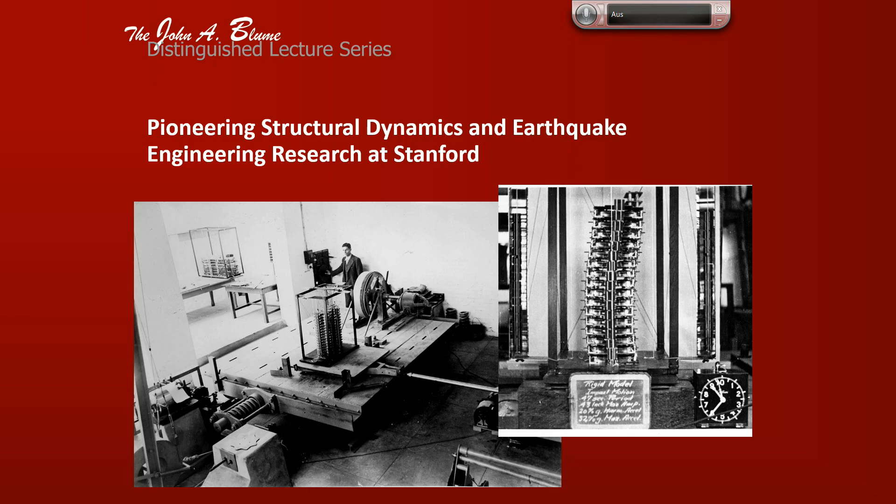This is a picture of the early shake table put in shortly after the 1906 earthquake, used for looking at structural models. There were also some studies looking at ground deformations at the time. A lot of John Blume's papers, I was looking at some of his paper titles today, focused on introducing soil effects and thinking about the effects they had on ground motions. This was in the 1950s.

Then John Blume Associates, from those very early days with that kind of analog shake table, brought it forward into his company.

This is just a snapshot of some of the projects John Blume and Associates worked on, in particular bringing in work from Stanford that goes back to Jack Benjamin, Alan Cornell, and Haresh Shah in early seismic hazard analysis, and Kavazanjian, looking at things like Diablo Canyon, Stanford Linear Accelerator, anywhere there were challenging aspects related to probabilistic seismic hazard, and also interesting mechanics problems like the NASA Ames wind tunnel and so forth.

So, kind of an amazing career. And John gave back one more way in that he endowed the Earthquake Engineering Center here in 1976. This is a picture of the two, John Blume along with the two founding directors, Jim Gere and Haresh Shah at that time. And so John's always been really a leader in professional practice, research, and education. And of course, that's something we like to continue here in the Blume Center, not just our research, but kind of bring that into practice and education.

So this is just an occasion to kind of take note of that, especially for the younger folks in the audience who haven't been here over the years. My colleagues have maybe heard this presentation from me a few times, but something to remember.

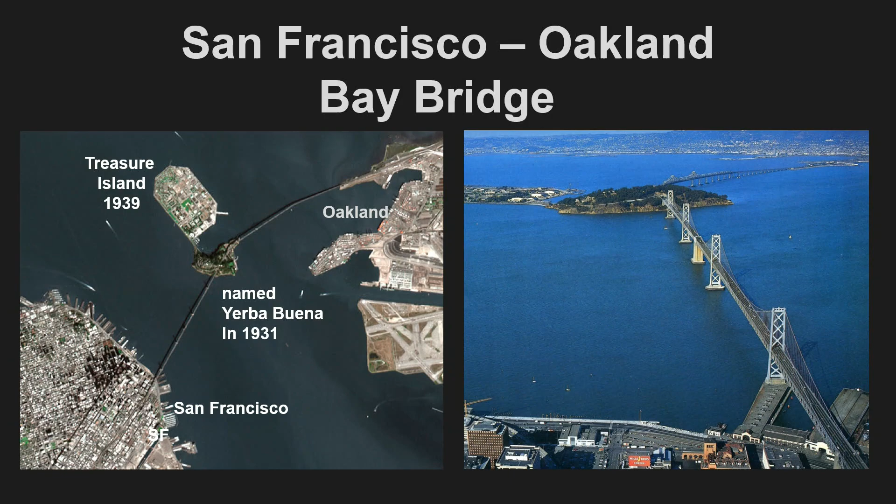They made soil exploration first, designed by this man called Purcell, Charles Henry Purcell. He started at Stanford with one or two semesters of training, then went to Nebraska, and became a state engineer in Oregon and then in California. He was selected as highway engineer for the Bay Bridge in 1930.

Later he became chief highway engineer. The other person I'm showing here is Glenn Woodruff, who was the main design engineer, a very important person for this project. He was later appointed to the board of engineers investigating the Tacoma Bridge failure.

And the final blueprints—for me it's amazing that the time from the starting point, let's say 1930, until they began to build the structure, was very short. In comparison, the Golden Gate Bridge took much longer; they proposed many things and planned extensively, but here it was very, very fast.

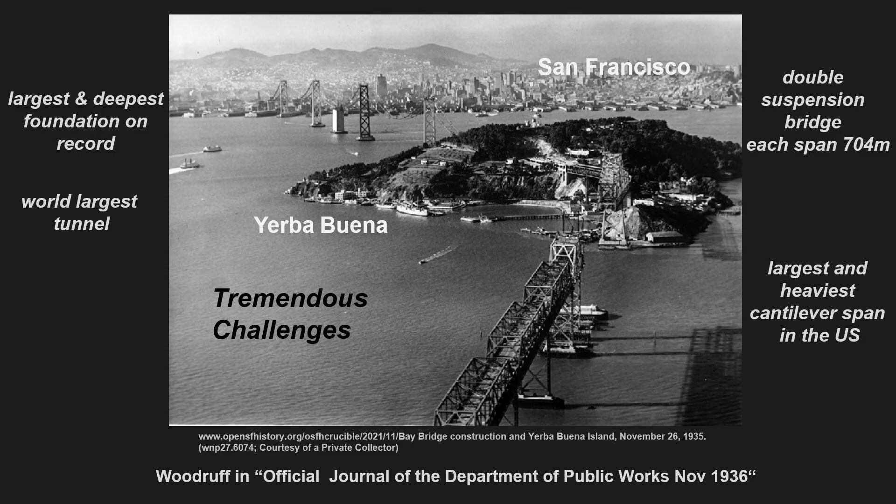I cite here Woodruff, the main engineer. When the Bay Bridge was finished, he wrote a report mentioning four extraordinary points about the project. He said: we built the largest and deepest foundation on record, and the world's largest tunnel. On the other side, we built this double suspension bridge, hooked together—each span 704 meters. And we built the largest and heaviest cantilever span in the US, on the Oakland side.

These engineers of course did different studies on what kind of system to use. We don't have time here to go into details, but it's very interesting—there was one proposal for a single suspension bridge, very much like the Golden Gate Bridge, almost the same span. But others were proposed, and finally they chose the two suspension bridges.

Ground anchoring is an important factor—anchored on the sides, and then in the middle with this huge block. On the other side, you know what has been selected.

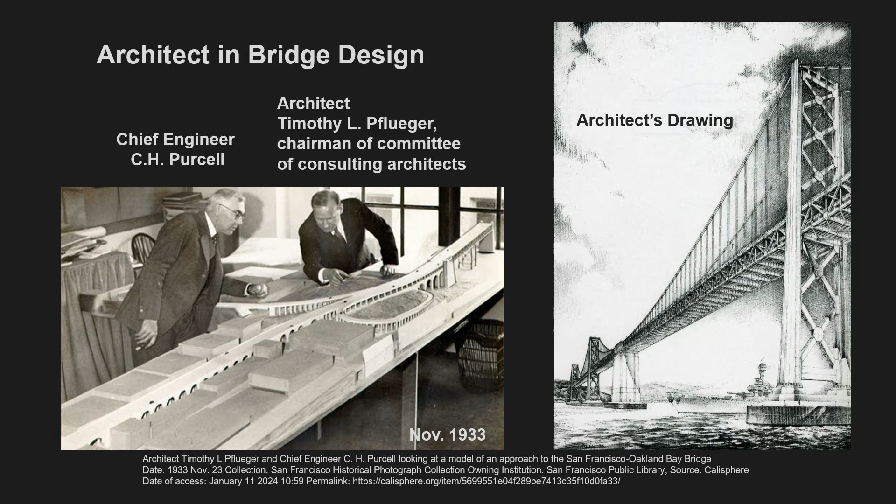Interesting enough, on both bridges architects were involved in the outer appearance, the aesthetics of the bridge. Here it was the architect Timothy Pflueger, seen here with chief engineer Purcell. He was chairman of the Committee of Consulting Architects, and they produced these wonderful architectural drawings. Here is a typical piece of work where architects apparently influenced the final appearance.

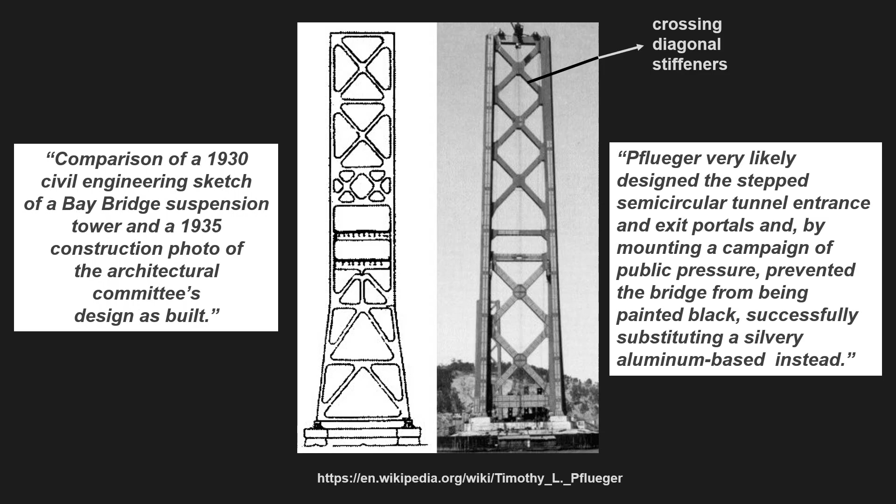This shows a comparison of a 1930 civil engineering sketch of the Bay Bridge suspension tower and a 1935 construction photo of the architectural committee's design as built. It was a little bit changed—they took out the horizontal bracings there.

Pflueger very likely designed the stepped semicircular tunnel entrance and exit portals, and by mounting a campaign of public pressure, prevented the bridge from being painted black, successfully substituting a silvery aluminum-based instead. So the architects apparently had some influence. This is a discussion I've had throughout my academic life—the cooperation between architects and structural engineers. It always comes up, and very often people find the names of famous architects attached to bridges, but the engineers are not mentioned.

So this was a very interesting construction going on. Of course, the foundation was a big challenge for them. Muddy soil on the San Francisco side, 73 meters below water level, and they used this caisson technique, big boxes lowered down, with airtight steel tubes to control the buoyancy, so they could lower the caisson and start the concreting. This was standard technology at that time.

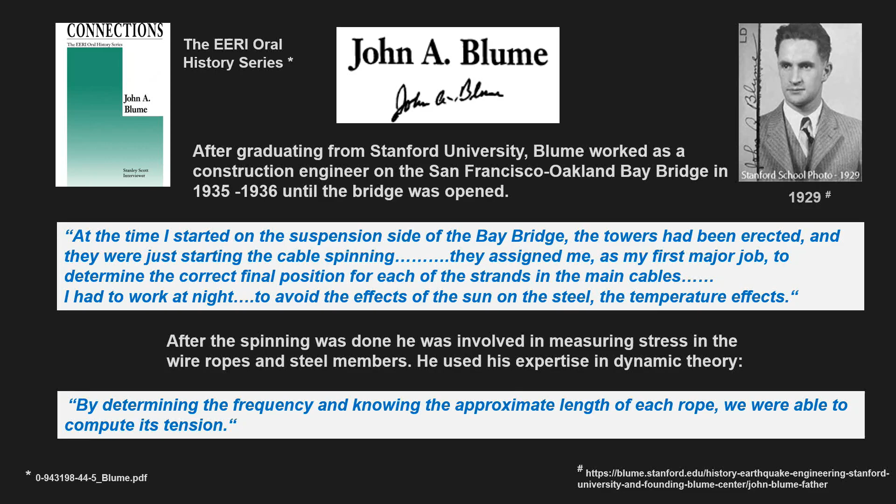There's this fantastic oral history series one can look at, and I'm quoting here from that. At the time I started on the suspension side of the bridge, the towers had been erected and they were just starting the cable spinning. They assigned me as my first major task to determine the correct final position for each of the strands in the main cables. I had to work at night to avoid the effects of sun and the temperature effects on the steel.

After the spinning was done, he was involved in measuring stress in the wire ropes and steel members. He used his expertise in dynamic theory - we heard about that with earthquake engineering - but here he used it already for some other purposes. He said, by determining the frequency and knowing the approximate lengths of each rope, we were able to compute its tension.

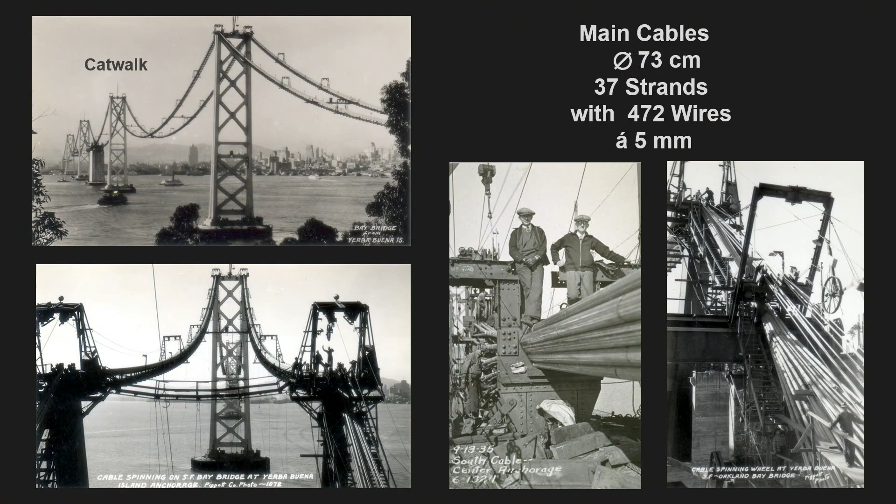The construction went on, and the so-called catwalk was established, seen here. The main cables were done, the spinning process started with all the individual wires pulled from one end to the other, and you see here these nice pictures.

Then, typical for a ground-based suspension bridge anchored in the ground, the construction is a very easy task because you can ship these prefabricated elements to site and simply pull them up. That's totally different from a self-anchored suspension bridge we will see later on.

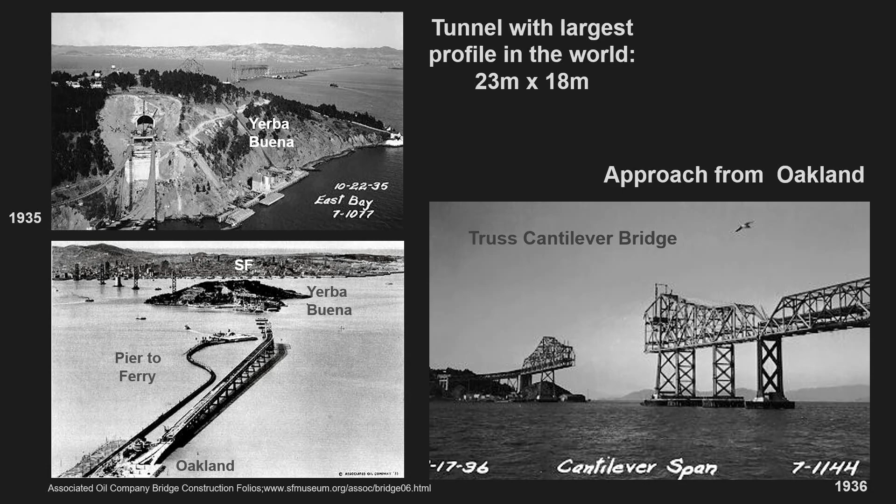So the double profile tunnel, the largest profile in the world, seen here, I mentioned that. And then they started also the Oakland side bridge, this cantilever bridge, and they had this pier to the ferry there, which later on of course disappeared. This is the truss type of cantilever bridging, and here you see it once more again.

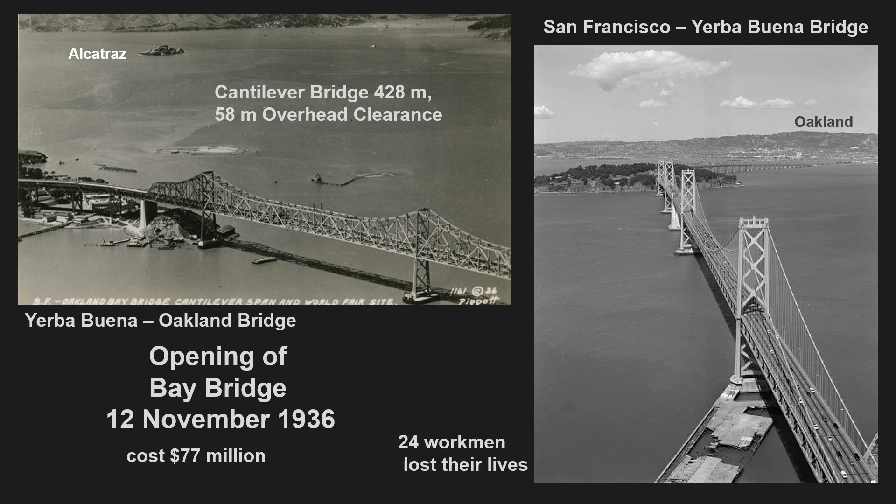Opening of the bridge was 12th November 1936, and it cost over 77 million US dollars. A sad story is that 24 workmen lost their lives on this site.

So it's very interesting, maybe amazing, that the American Society of Civil Engineers, ASCE, chose the Bay Bridge in October 1955 as one of America's 7 modern civil engineering wonders. They appreciated apparently these difficulties with these different situations and so on.

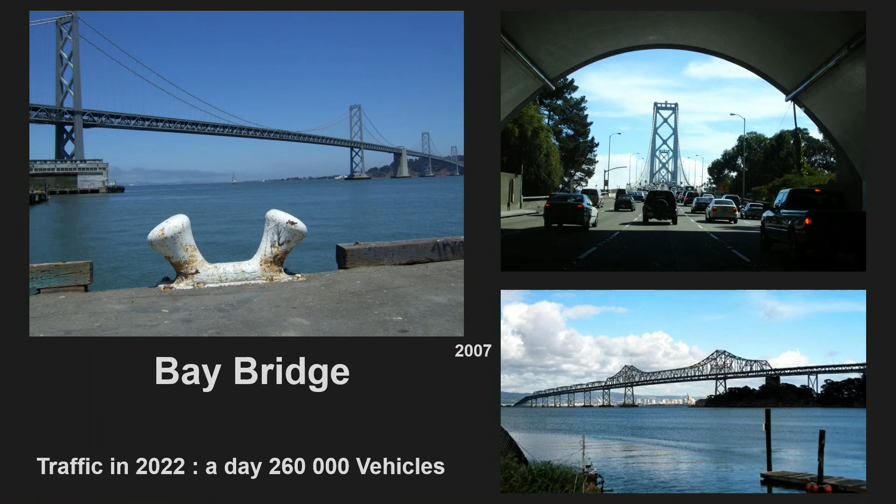Some people, Bob, you told me you remember this, that there was a key system, a railway system on the bridge, and that was stopped in 1958, changing to the second line, which we all know when we pass the bridge. Now, these Bay Bridge pictures were taken by myself in 2007, always very nice pictures.

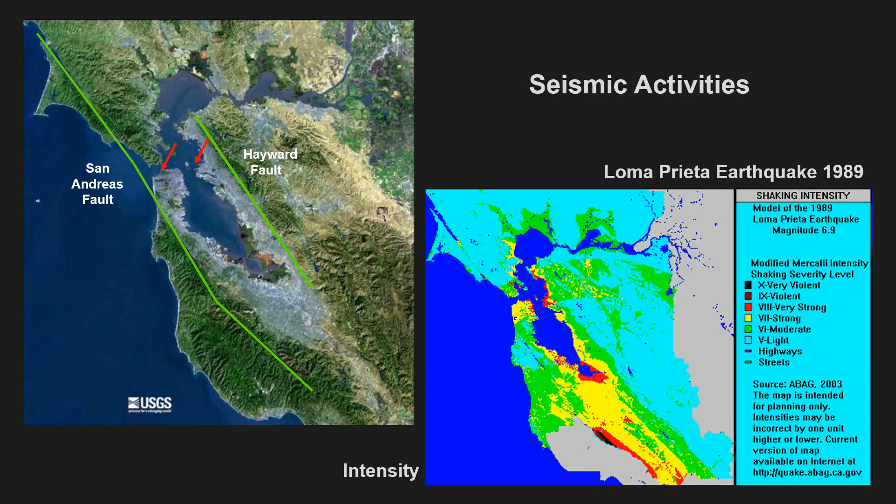And then we have to talk about seismic activities, of course. The faults coming into play here, the San Andreas Fault, Hayward Fault, you all know that. The right picture shows the intensity of this earthquake from 1989, and you see the red parts and the white and black parts here on that sketch.

All of you probably have seen these pictures one day, on this main bridge on the Oakland side. One deck, the upper deck, collapsed onto the lower one, killed one person because this deck part slipped from the foundation there, coming down, as you all know.

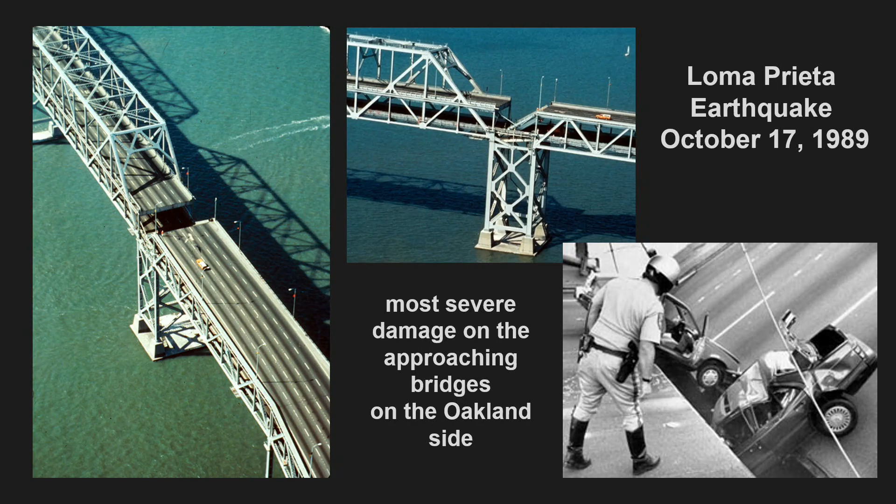But the most severe damages on this type of bridge were on the approaching bridges on the Oakland side. Nobody really did, in my opinion - I don't know how you have handled that. When I went there later on, I was looking for what they have done for retrofitting on the San Francisco side. Nobody was talking about that, but you see it if you go there.

Then we have to talk about the new bridge on the Oakland side. I'm a little bit afraid you probably know more than I do, because you could follow the construction very much. I will only mention that there were finally variants discussed, listed here by Caltrans, who was responsible for that, and consulting companies. In 1996 these were done - you see here one tower, two towers, concrete, steel, and so on, and even a no tower on the right downside, just extending the skyway.

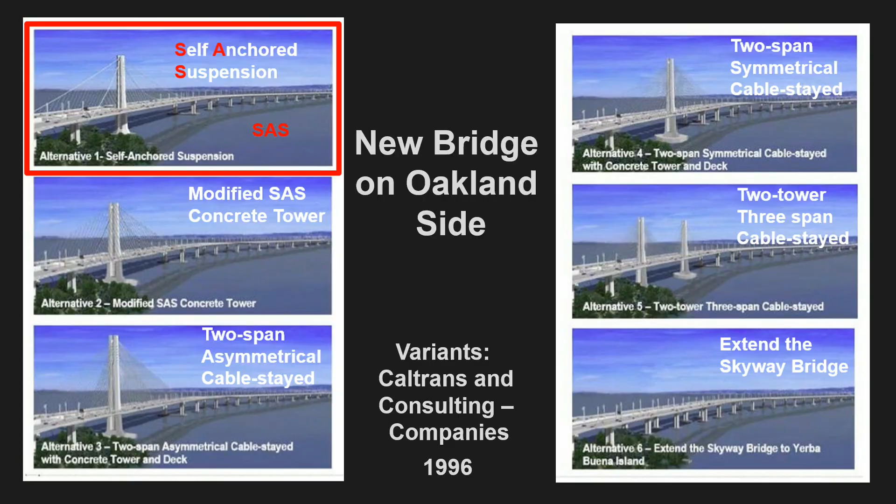And they have chosen the self-anchored suspension bridge - a very different thing. I remember, that's why I say you know more than I do, that there was a big discussion, not only in public but also among the experts, whether that is a correct structure against earthquake attacks and so on. But they finally built it, and we hope it is right.

So you all know about this new bridge, so I can be relatively short, I guess. They called it a signature bridge because they want to have a signature in the landscape - not only the Golden Gate Bridge is there, here is also a bridge which is important. Here you see one steel tower, or at the bottom you see the concrete part and the steel part. Here's a walkway added to the structure.

And here you see this one tower with the cables coming down, self-anchored. I'll come back to that point in a minute. So, a little bit more for the experts maybe, but I mention it anyway - design concepts.

It's like in many of these countries - you know more about that than I do, because I'm not living in an earthquake-affected country, but we have worked in other countries where earthquake is playing an important role. Of course we all know about energy dissipation, and you want to control that through local replaceable elements, the so-called fuses, mechanical fuses. You would like to have independent movements of major structural components available - no connection of the girder and the tower can be seen here. The self-anchorage is a kind of independence from the local ground.

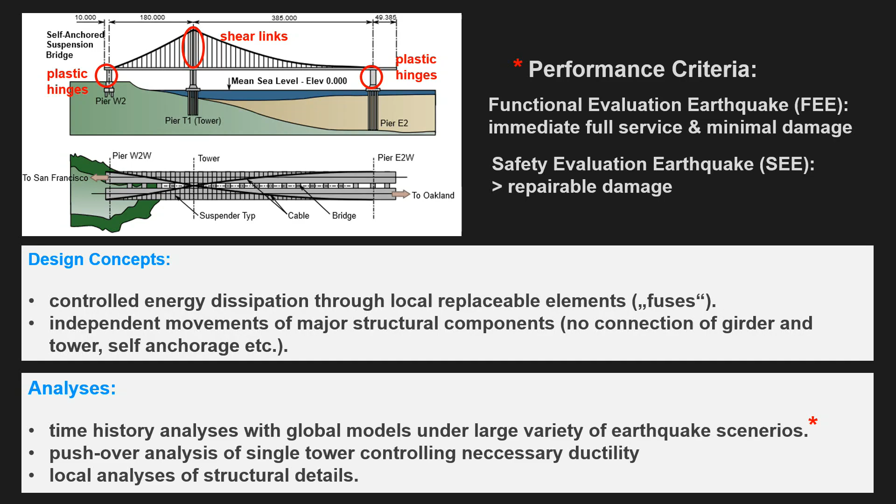It's important. And regarding the analysis they have done - time history analysis with global models, of course, under a large variety of earthquake scenarios, with two different performance criteria. That's something for the experts: the functional evaluation earthquake, with immediately full service after the earthquake happens and minimal damage; and on the other side, you would not like to have a failure of the bridge - the safety evaluation earthquake, that it could be repairable, of course, and so on.

And that has been done here. The skyway, the concrete one, is essentially a traditional type of construction. It is the precast elements here. You see that the elements here pulled up and hooked to the existing part.

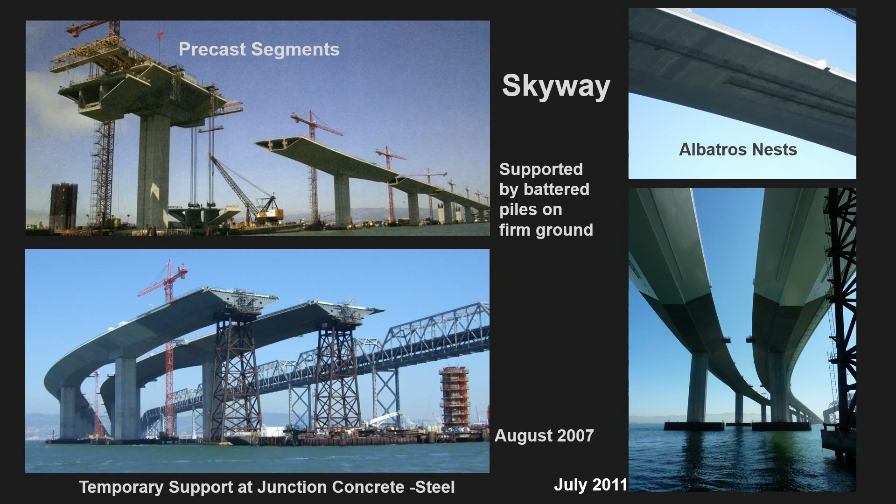And here the specialty is, of course, that you have those two lanes. You all know that. The environmentalist had an influence, as you can see. They added albatross nests here. They had to do that.

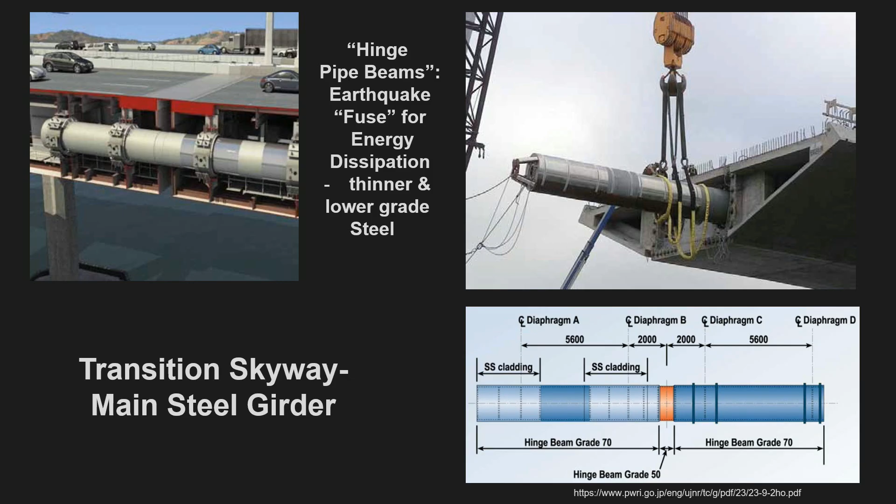That's what I read. And then another fuse here between the concrete part, the skyway part, and the steel part, the so-called hinge pipe beams. This fuse is added, and here you see a middle part of it, orange part, which is thinner and has lower grade steel and is supposed to plastify, to take the energy. That is the idea. And then you can take out the entire pipe here, put a new one in, and that's it. That was the idea.

So then also a very interesting phase of the new Bay Bridge started. They had all these bids coming in for the steelwork of the bridge.

And of course, United States companies, Japan, Japanese, Chinese, all over the world, French, and so on, and they did win the story, as you know, the Chinese company. And then this company here, Shanghai Zhenhua Heavy Industry, has never built a bridge before. They were famous for cranes and sold cranes all over the world. Even in the United States, most of the cranes used are from that company. And they did win, and it was probably not so easy for the American people.

To stand this situation. So here you see how they shipped this start here from Shanghai. They built a huge factory in Shanghai. I've seen pictures of how they did weld all these elements.

And on the right side here you see what now is a difference to the ground-anchored construction. Now you need these temporary truss falsework because the cable is not able to carry this stuff, because it's not yet really fastened in the girder. The girder does not exist yet.

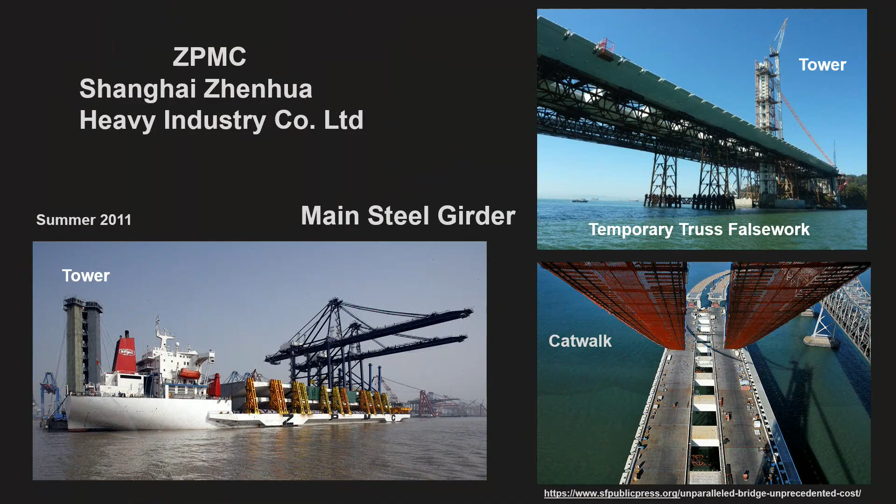So Shanghai Zhenhua Heavy Industry here, once more again, a right picture, the catwalk and so on. And here another energy dissipation element in the tower. There are 4 legs, as you can see. You see them under construction here.

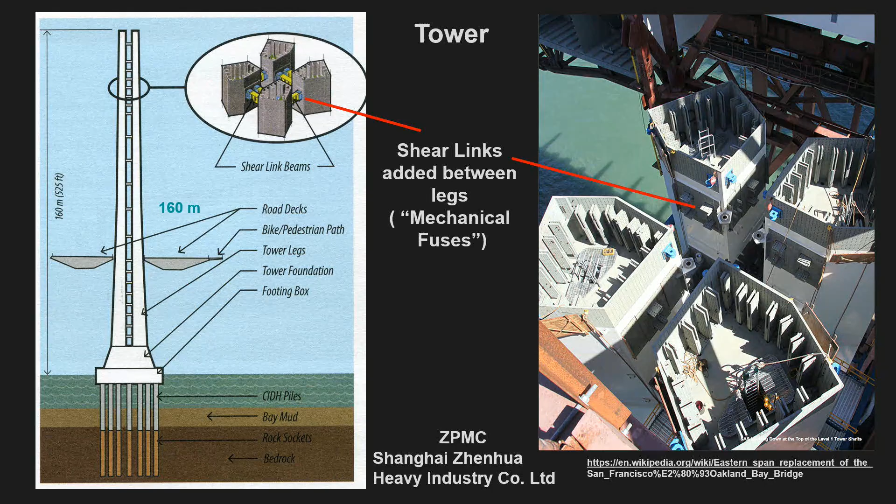And you see this place is still open, and there should be shear links added, and they are supposed to plastify, to take the energy in the structure, and could, of course, in case of an earthquake, be replaced later on without damaging the entire structure. That was the idea. And also, these shear links have been intensively investigated.

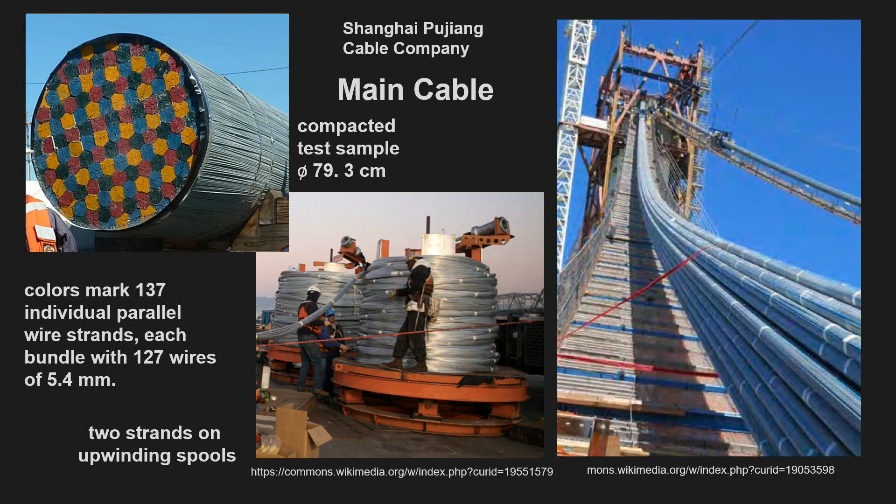The main cable also produced in China, and different from the Golden Gate Bridge, which we see later on, and from the old San Francisco side here, not the individual wires come to the side and are carried over by spinning process. Here the entire strand has been wound up, and then put to the main cable.

Self-anchorage, once more again. So we see here how it works. You can see that the forces come down, and then they go down again, up, and down, so and so on, and go underneath at the final end. And this is a shortcut system. It's a self-anchored suspension bridge.

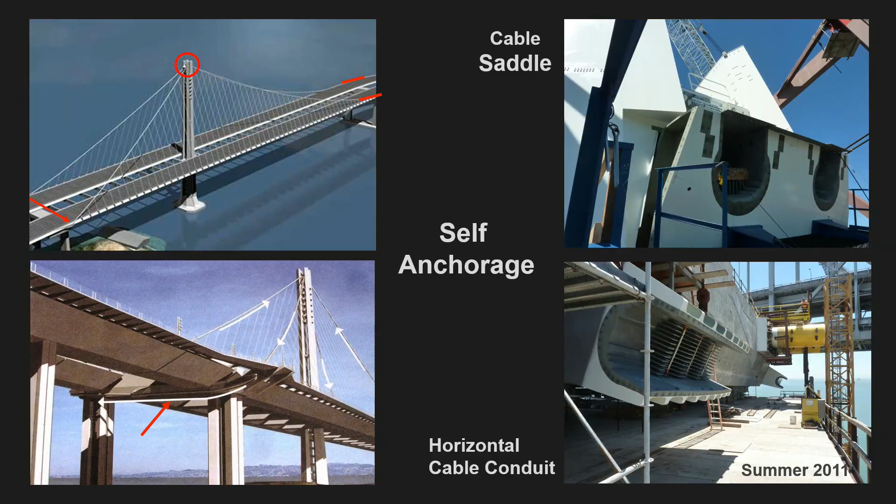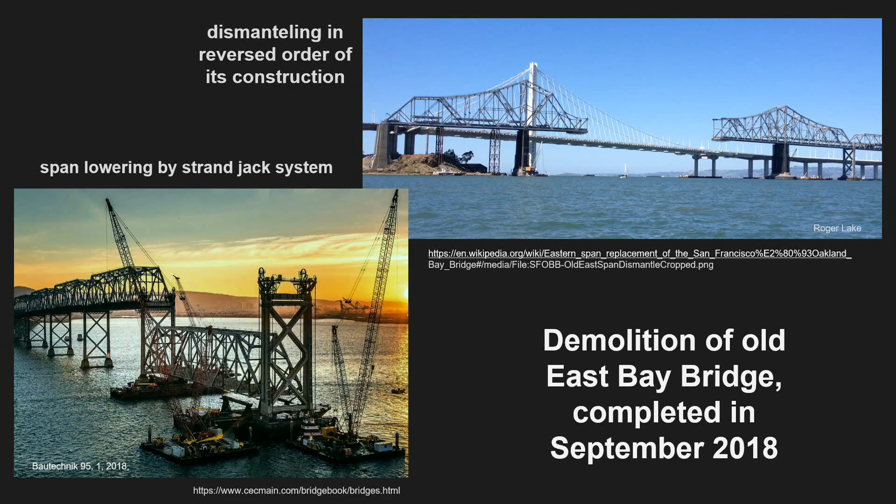So then the old part had to be demolished, finished in 2018, as you can see, and they did it just the same way as they built it, just the other way around, in reverse. In particular, you have seen these pictures here before, as if you would build them together. Now they took them apart, and here taking off and lowering this system by strand jack system.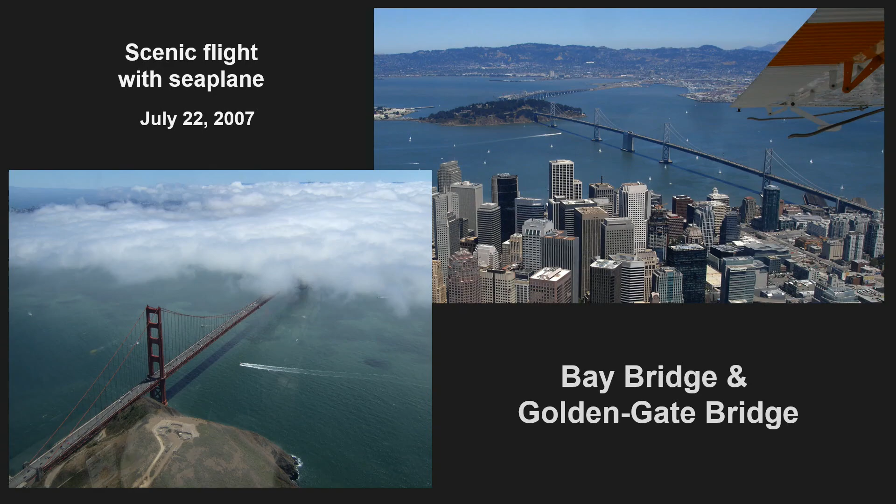So I had the opportunity, my students gave me that as a gift, to fly, have a scenic flight with a seaplane with my wife together in 2007, and I have taken these pictures here from the two bridges. Wonderful. So I come now to the next bridge, San Francisco Golden Gate Bridge.

Okay, there are so many nice pictures, I don't have to show too many of them. But I will tell you how that started.

In World War I, 1916, the civil engineer and editor James Wilkins proposed in the San Francisco Bulletin a bridge across the Golden Gate.

A little later, the San Francisco city engineer O'Shaughnessy began inquiry among major bridge engineers in the US. All answers, except one, were negative: too risky and too expensive, it would cost $100 million, impossible. This one man was Joseph Baermann Strauss, at that time 48 years old.

Now I have to tell you a little bit about his story. He was born in Cincinnati, of extreme short stature, talented in math and mechanics. He graduated in 1892 with a thesis to span the Bering Strait. He was extremely ambitious and had an enormous ego, not an easy character - a rather tough person. His intention was to make everything better and larger than others.

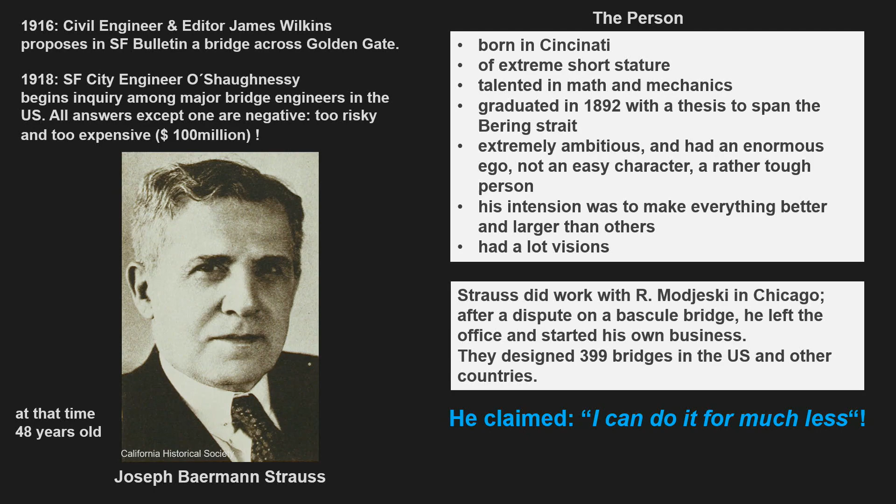But he had a lot of visions - good sign, I would say. Strauss worked in Chicago with Ralph Modjeski, whom we have already seen in the picture for the Bay Bridge. After a dispute with Modjeski on a bascule bridge, he left the office and started his own business.

In his consulting office, he designed 399 bridges, smaller ones of course, in the US and other countries. And Strauss said, 'I can do it, and for far much less.' That was his statement. He did believe in that, and he was right.

But now in 1925, another person became involved - we have heard that name, Moisseiff, already - who came into play and proposed a real suspension bridge, which we all know. It happened like that; he proposed it. It wasn't Strauss who did that - Moisseiff was the expert for this kind of structure at that time.

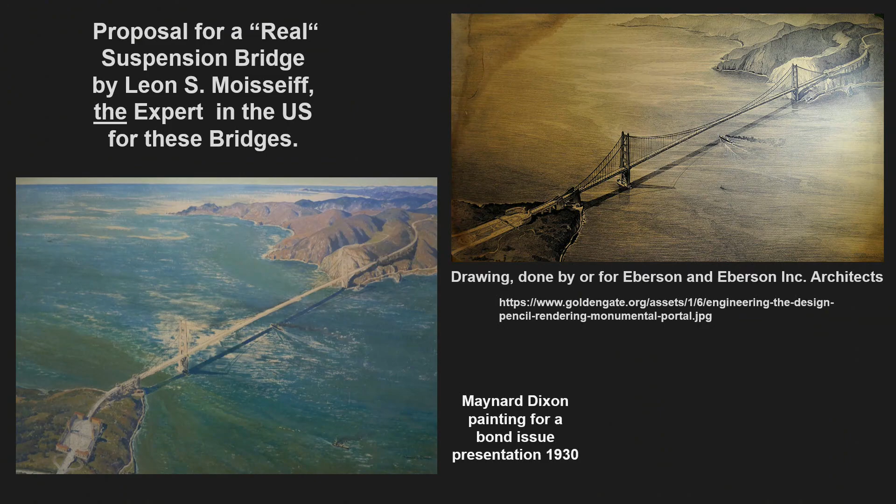Here you see a painting from Maynard Dixon, done for the bond issue presentation in 1930, and another painting on the other side.

I have to tell you again about this famous engineer Moisseiff, who on one side played an important role as a suspension bridge expert, and on the other side there was somebody in Joseph Baermann Strauss's office called Charles Ellis. I'd like to quote a little from this report, American Experience, because it's essential for the situation that comes up now.

Moisseiff worked in tandem with Charles Ellis on the engineering of the Golden Gate Bridge. Moisseiff especially contributed to the force calculations related to wind impact on the bridge. From his New York office, he traded telegrams with Ellis in Chicago, going over an endless string of engineering questions. Together, Moisseiff and Ellis explored the practical application of Moisseiff's deflection theory of suspension bridges. They made their bridge design flexible enough to withstand the gales that often blew through the Golden Gate.

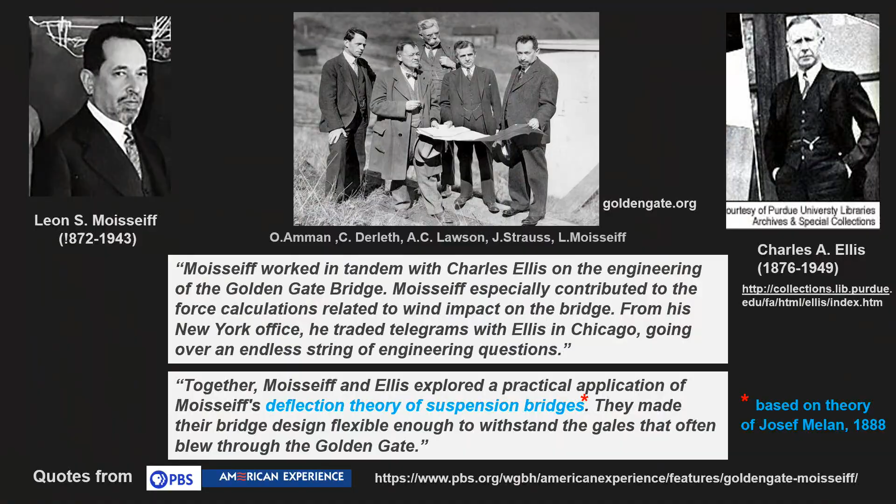I would like to add, the suspension bridge theory is based on a theory by the Austrian academician Josef Melan from 1888, which Moisseiff adapted and refined. This picture shows some famous people, as you can see. But there in the late 20s, there was this proposal from Moisseiff for a suspension bridge.

There were a lot of problems coming up that they had to solve. The foundation, in particular for the South Tower, was in the water, as you know, and they were not sure what kind of soil they could expect. It was really muddy and not very good soil. They made test drillings and so on, and finally they found it could be done.

The armed forces harbor there, in Oakland Harbor, had a military base. They were very strongly against this bridge at the beginning, because they were afraid that if something happened with the bridge, they could not use the harbor or the base anymore.

And then there was this enormous pressure from the people: you have to do something now. The ferry traffic was immense at the time.

And then we have to talk about finances. It is a public bridge, of course, but on the other side, it is not the state of California, not the federal state. It is a district - San Francisco and I guess 5 counties to the north, Marin County for example - they make up the district, and they are responsible. But they are not rich enough to support building such a bridge.

So I have to talk a little bit about the blueprints here - at that time they were really blue blueprints. You have to know that on the left side there is soft soil, serpentine. That is important. Here's the arch on the north side - it's a very stiff, sound material, diabase basalt, very strong, very easy to make a foundation on.

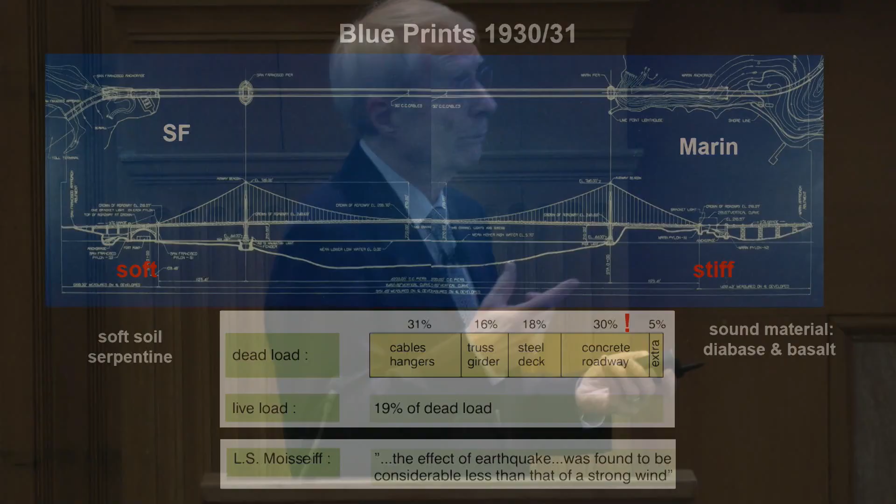I added this because in my opinion it's very interesting: the dead load of the main structure, except the cables. For the cables, the dead load is 31%, truss girder 16%, 18% for the steel deck, and 30% for the concrete deck. If the dead load is 100%, then the live load is only 19% of that - very typical for these huge bridges. You need enough material to carry just a little bit of load, so to speak.

And Moisseiff said the effect of earthquake was found to be considerably less than that of a strong wind - and he was completely wrong. We know that nowadays.

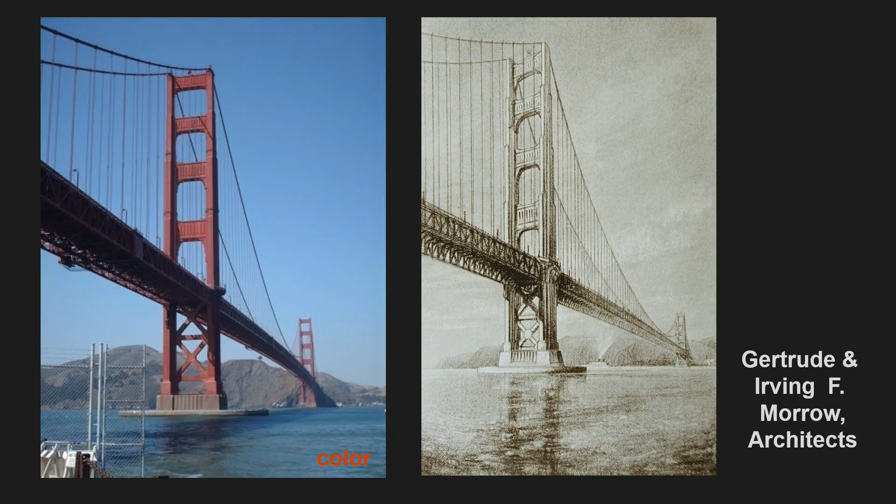An architect came into play here also, or I'd say two architects, Gertrude and Irving Morrow. They had an important influence on the outer aesthetics of the bridge, and he defined the color, I'll come back to that later. Here you see what the Morrows did, in particular the towers, the cladding of the diagonal bracings, stepping down with the thickness of these columns on the side and the decreasing ascent. That's Morrow's proposal, and I think it's very nice. All the Art Deco decoration of the bridge, light posts, pedestrian railings and so on, are based on the proposals of the Morrows.

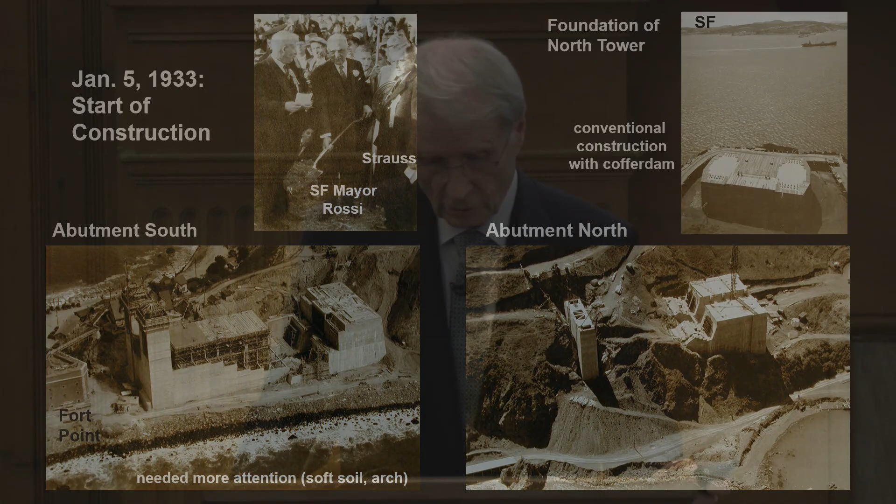The start of construction, 1933, Mayor Rossi came here. Then the foundation of the North Tower, very simple, very classical. They could make a cofferdam, as it's called, and make a dry construction site and concrete it as a usual tower would be built. Then the abutments, these huge blocks - we have this situation where the cable forces have to be anchored in the ground, so the boxes had to be very big. You see that in the north, very simple but huge, and in the south a bit more difficult because of the soft soil.

Then you see here the Fort Point. They had to add the Fort Point construction to that, and the forces from the arch had to be taken. So the most difficult part in the construction time of the Golden Gate Bridge was this situation here.

The foundation of the South Tower here, you see the fort, they built a trestle bridge, and started the so-called fender, a steel construction lowered down to the ground. Then again a caisson should be placed there, and they shipped the caisson here. At that very moment a strong storm started that tossed and pitched so badly that they almost destroyed the fender when they came into that situation. They took it out and scuttled it in the bay - I don't know where, but it must be someplace.

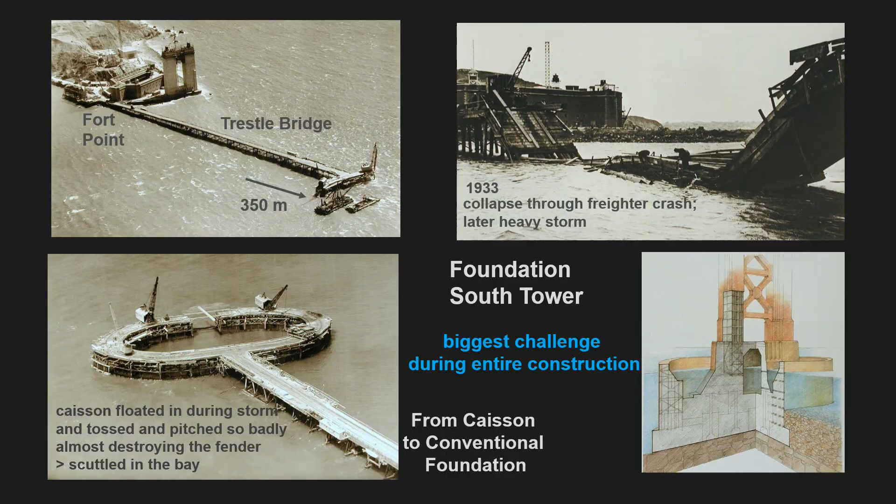So then it happened, 1933, this trestle bridge collapsed due to a freighter crash. Shortly thereafter a heavy storm came, another collapse, another destruction. It was really a big challenge for them, and they really didn't know what kind of construction to use, so they changed the caisson construction into conventional foundations.

They had this fender here, this situation on steel structure, and now they could really start underwater concreting. Then they had these little inspection shells coming in so they could really see what kind of soil they had here, and check if it was true what they had investigated. That was apparently a big question.

As a structural engineer, a structural analysis man, I was interested in what they had written in the books. Strauss, in his final book about analysis, wrote very little - he didn't mention Moisseiff's influence at all, nor Ellis' influence, nothing. The only thing was some words about the analysis you see here sometimes.

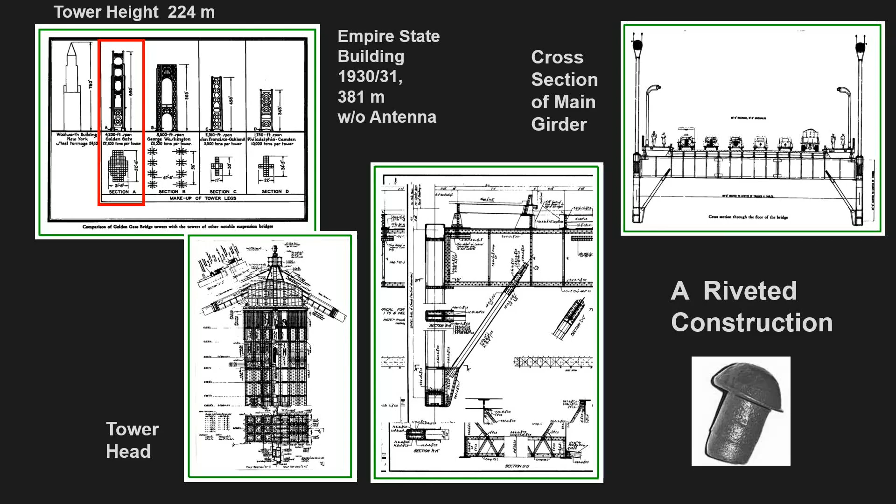A U-type of girder. Here, the main frames, and then the beams in between. And once more again, it's a riveted construction. All the rivets had to be placed, and that was heavy work at the time.

These elements also came from the east, Bethlehem Steel in Pennsylvania, and they were shipped through the Panama Canal. The North Tower was built, then the South Tower.

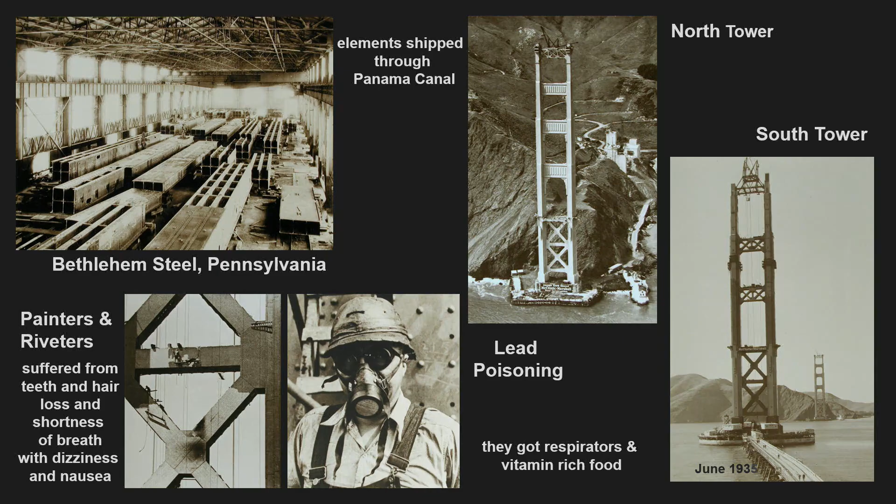At that point in time, they were very flexible. There was no cable existing yet that could fix that a little bit. It was very flexible, apparently.

And then it happened that the painters and riveters had lead poisoning. They suffered from teeth and hair loss, shortness of breath, dizziness and nausea. So they got some respirators and vitamin-rich food. It was a serious problem.

It was hard work. They had to rivet inside these boxes, and the rivets were heated up, shot hot into these boxes, and had to be placed in their correct position.

The cable block, the Roeblings came. The Roeblings came from New York, and it's said they were tough people, very strong. They hired and fired - I heard about that. They wanted to be ready in 6 months, and they did it.

The cable saddle, a huge metal block, pulled up at that time in all the places. Then the catwalk again, and the spinning process began again. This goes back to Louis Vicat, a Frenchman, cable spinning method, 1829. So it's a conventional method, but applied in a huge structure, of course.

So here's some shots from this situation. There's the funicular pulling these little wires from one side to the other. The cable had to be made of strands, and then they are compacted together.

Underneath this figure, this photo, I saw the name, the first commuter. It's a nice man with an ordinary hat, walking on the catwalk.

And then they started the girder construction, prefabricated in Pennsylvania as I mentioned, and you see here one piece in this picture - that is this one here, and there are people inside this net, and Strauss was concerned about safety.

It was Strauss' idea to add this safety net. It was never done before, and this was the first time they did it. It saved a lot of lives. And these people founded the Fellow of the Bridge Club, or the Halfway to Hell Club.

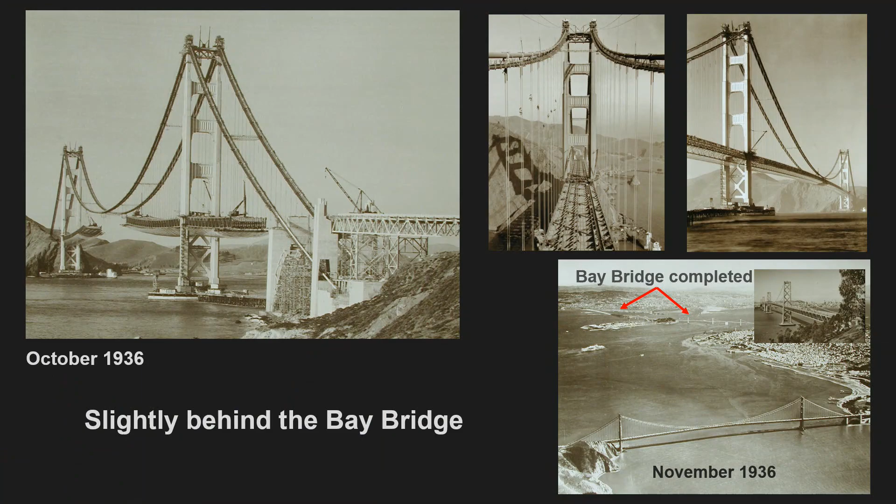So they were slightly behind the Bay Bridge. The Bay Bridge was already opened here in November 1936. And this is an amazing picture. I read that people were afraid they would never make it, to find the connection between both sides, but they investigated the situation carefully through experimental work, tested it, and we've seen that it worked out. Here you see the rest of the structure, and the bridge was already fixed.

And then Morrow comes in, and again color comes into play here - the international orange. Why international orange? He played around with some test paintings, black, silver like the military ships, and so on, but finally insisted on this color.

When I was in Berkeley in '89, I read in a newspaper that somebody said we have to change this color, it's too expensive. And there was an uprising - we want to have the orange still existing here, and that will never be changed.

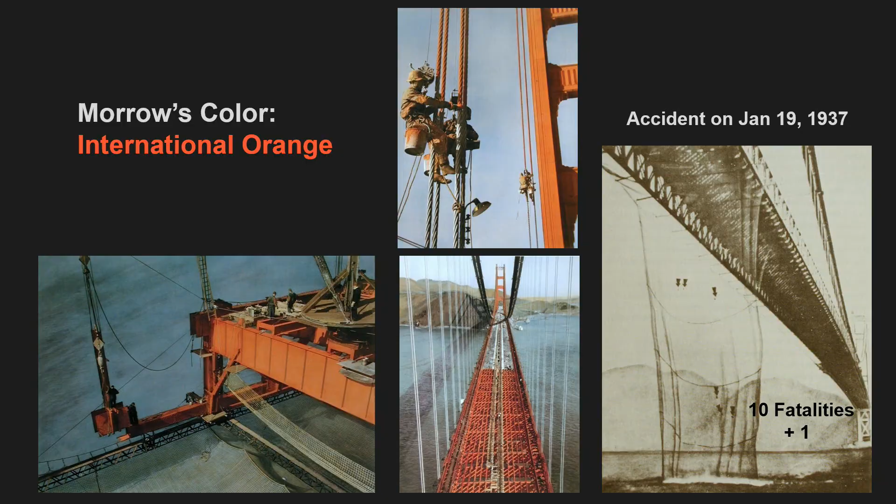And then, unfortunately, this happened. In the almost finished situation, a scaffolding part fell down into the net and pulled more than 10 people with it. Some could be rescued, but there were 10 fatalities, and one person was killed when a derrick on top of the bridge failed and killed another man. 11 total - we had 24 in the Bay Bridge.

So, the opening in May 1937 - Strauss again, Rossi came and cut the chain, and so on. And there's a saying about a golden rivet - they could not set that rivet at that moment, so they put it in another place in the bridge, and nobody knows where that is.

So the opening had a pedestrian day, an automobile day, and all the people had to pay, by the way. I would say typical American. So, okay.

Now we come to the end of Strauss's part here, and he quoted O'Shaughnessy: everybody says it can't be done, and even if it could be done, it would cost over $100 million. And I said, I believe I can do it, and for far less. Then 20 years later, he said it took 2 decades and 200 million words to convince people that the bridge was feasible, but only 4 years and $35 million to build it.

Strauss then left the project and went to Southern California, and passed away a year later from a thrombosis.

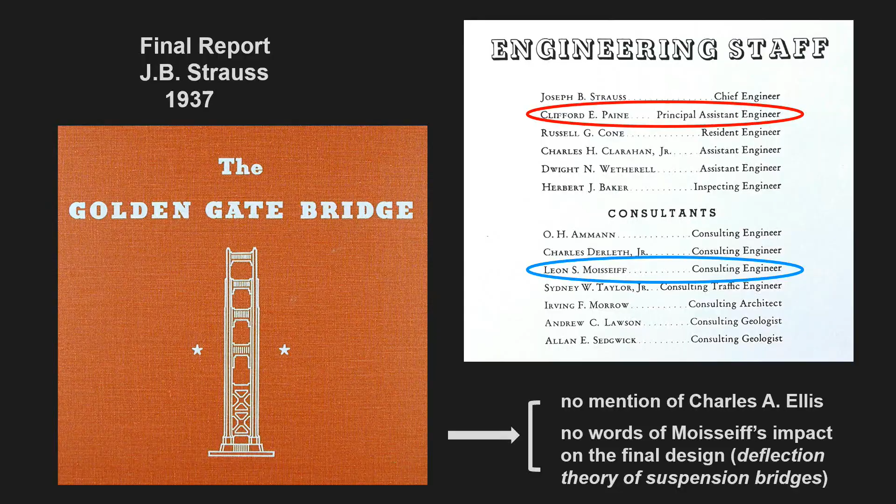So he has written this report. I mentioned that only Clifford Paine is mentioned, but not Ellis, and Moisseiff is only mentioned as a consultant, although he had an essential impact on the situation. So you can make thousands of pictures of this nice bridge and so on, and then it happened.

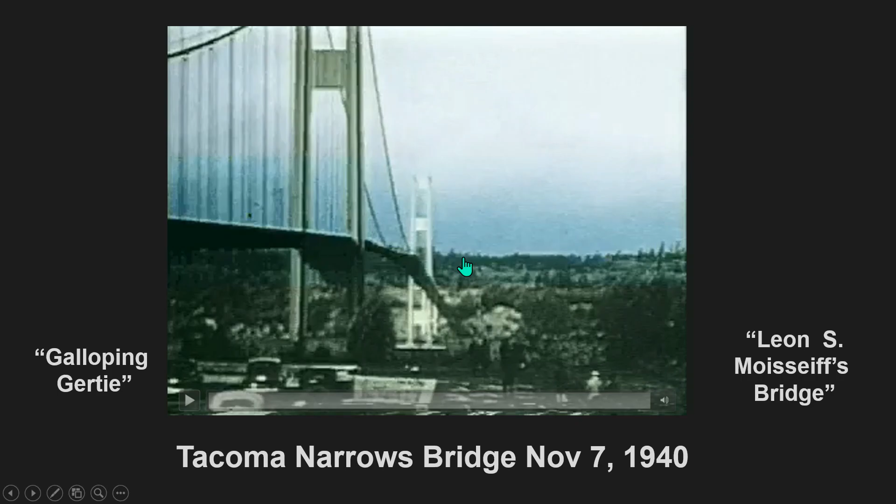You all, I'm sure, have seen this movie. Is there somebody who has not seen the movie? The Tacoma Bridge failure in 1940.

Here you can see how flexible suspension bridges are before they collapse. I found it amazing what they really do, the movement, before it's destroyed. There's this torsional thing, this cut.

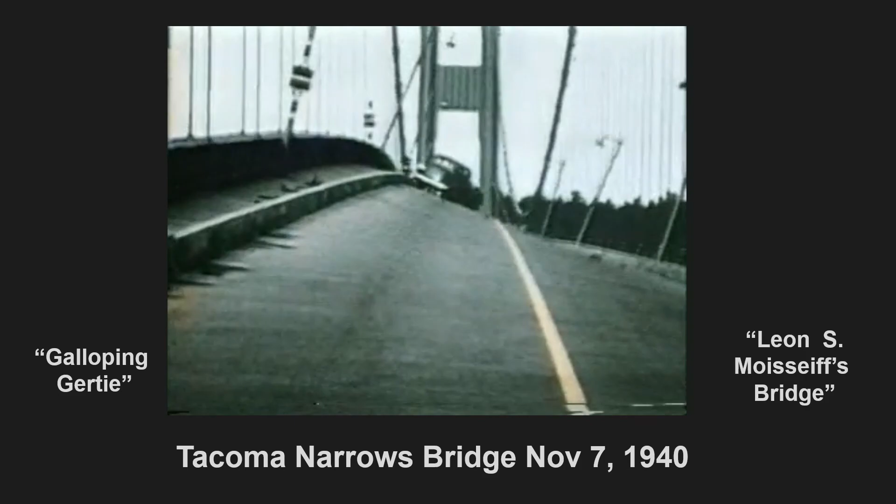Is this a real cut? I think so. And unfortunately there's one dog in this car, he was killed. So now it failed.

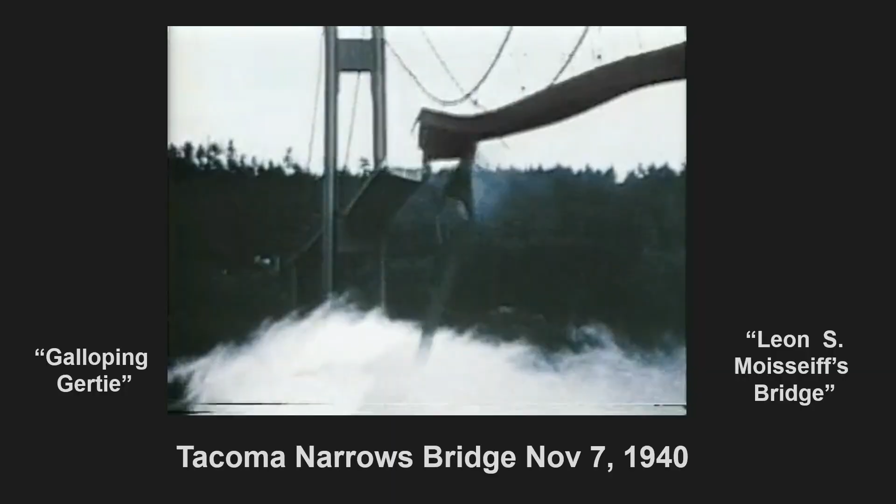And the tragedy was that it was Leon Moisseiff's design. So there was a tragedy for the man who was responsible for that bridge.

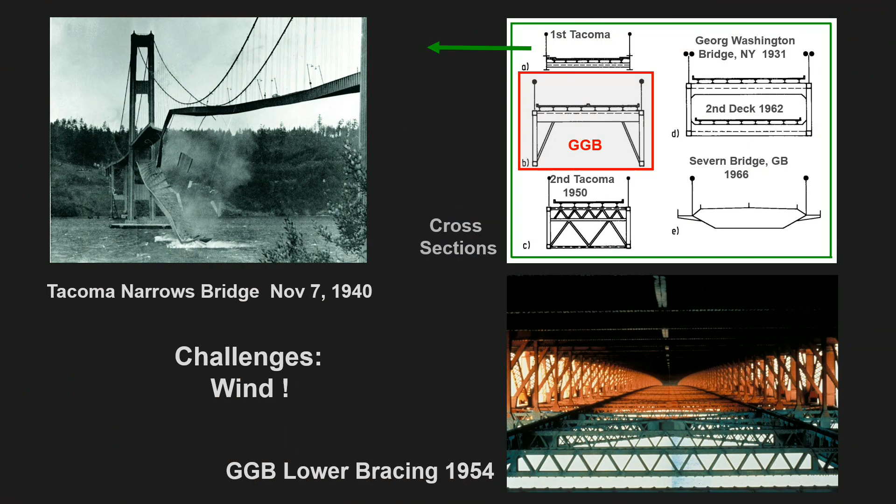So that is a failure. The Golden Gate Bridge had this U-shaped part here. The Tacoma Bridge was very slender, with almost no torsional stiffness. But also here, a U shape has very little torsional stiffness. As with the George Washington Bridge, they added a lower deck later on. It becomes a box, which is much better, of course.

And there are many bridges in the world where they have chosen streamlined cross sections to avoid these wind effects and so on. They were very much concerned about this on the Golden Gate Bridge.

What should we do now? It had already survived heavy winds until 1940, but they said we want to be on the safe side, and they added a lower bracing here. If you go there you can see it - you might not recognize it at the moment, but it is now a box-type cross-section, and the torsional stiffness increased by a factor of 50.

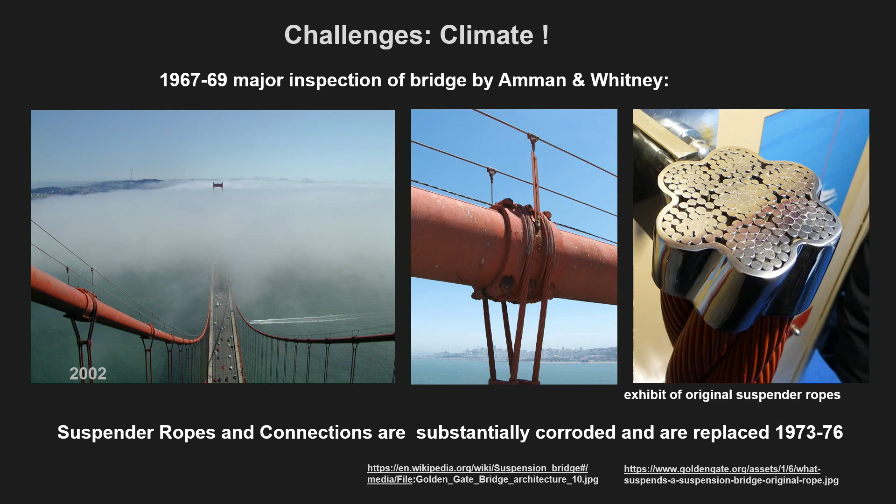So the next challenge was the climate. In 1967-1969 there was a major inspection of the bridge by Ammann and Whitney, and they found that the suspender ropes and connections were substantially corroded, some already in a critical state, and they were replaced soon thereafter.

International orange - they are painting continuously on the bridge. That is said in the report of the Golden Gate District. It is wet there, the wind is coming, and so on.

And at home I have this gusset plate from the bridge. It was taken off, and I didn't steal it from the place - my student came one day, having visited the place, and gave it to me. 'You are interested in the Golden Gate Bridge?' And they gave me this piece of paper with their signatures. You see how corroded this stuff is, so I have it at home.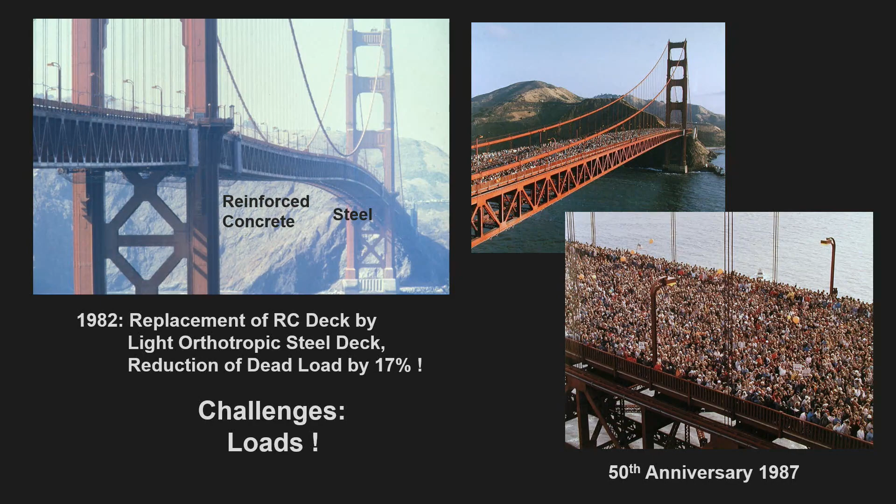On the 50th anniversary, in 1987, the bridge was full of people. Some people, I've read, were afraid - 'can that stand that?' - because they had seen this picture, it's almost flat. But it is no problem. You can analyze it a little bit, it's no problem.

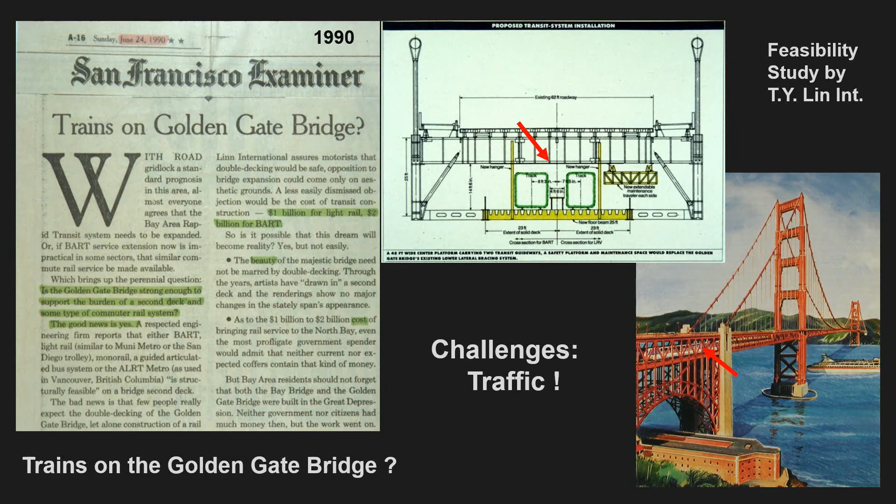Around this time, I was in Berkeley again, and somebody sent me a year later this little article, 'Trains on the Golden Gate Bridge.' They made a feasibility study because of the heavy traffic and ferry traffic and so on - can we extend the BART system? One of these trains here is BART, I don't know which one, the other is a kind of tram situation. Here you see an image of that potential, but that was too expensive.

They didn't do it. Then the next challenge comes up: earthquake. I don't have to tell you much about earthquakes, but I want to mention what happened to the Golden Gate Bridge.

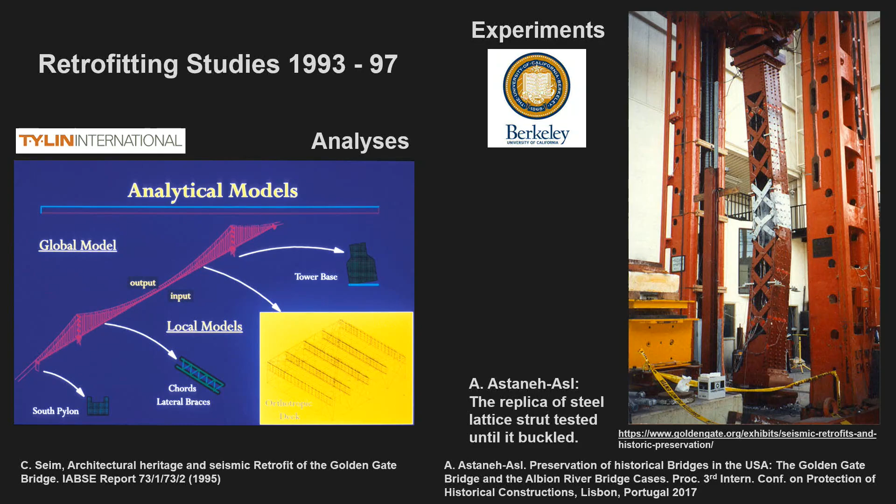Already in the 1990s, T.Y. Lin made analyses of how certain elements should be replaced. Local models were done, experiments in Berkeley were done. Here's one scene on the right side.

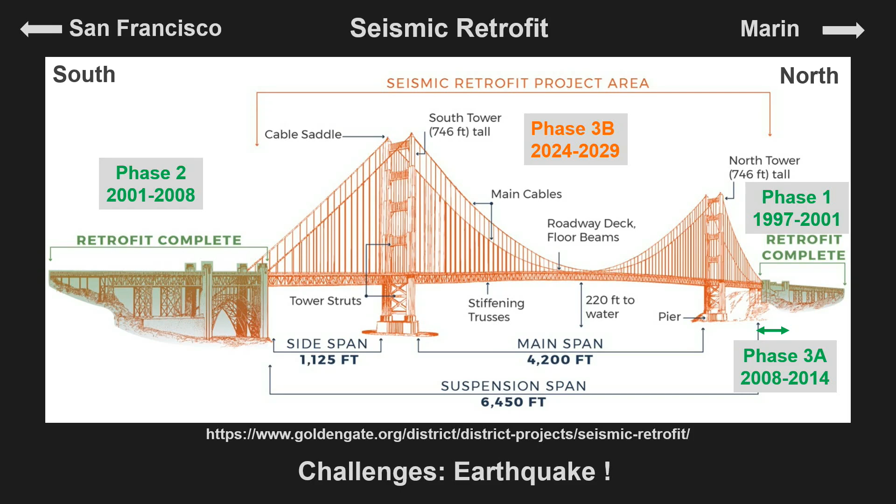Since 1997, they started this retrofitting project, which is ongoing and will continue another 5 to 6 years. They started on the approaching viaducts, shown here in green on the left and right side, south and north. The left side is the arch we've seen, the right side is the Marin County side, because these parts of the bridge were the most vulnerable, and they changed them first. The main part in the middle will begin shortly.

I don't have time to go into details, but it's substantial what they've done in the meantime. They replaced complete towers. This one is completely restored, built new. Here the foundation of this arch is replaced and fixed. A lot of dissipation elements have been added here.

At this moment, I'd like to mention Ewa Z. Bauer. Bob, you remember she was our guide on site when we were there together one day. She is chief engineering officer of the Highway and Transportation District, and I'd say she is probably one of the most successful female engineers in the US.

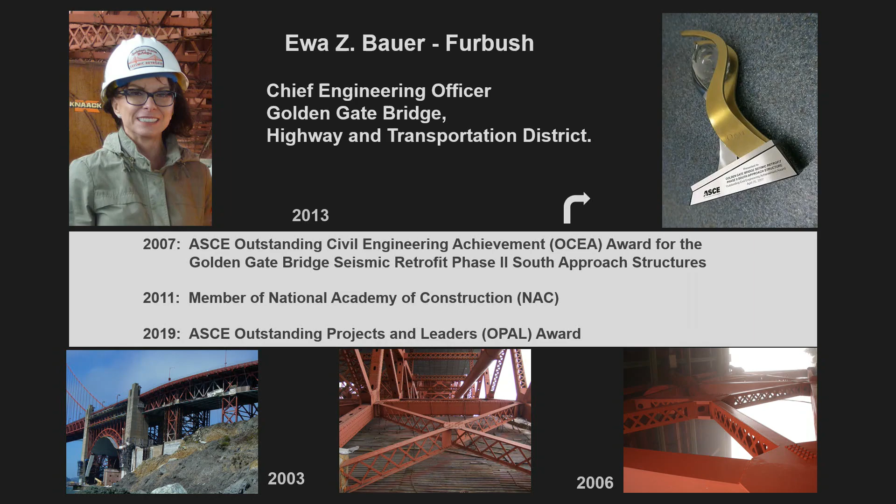She received the Outstanding Civil Engineering Achievement, the OCEA Award, for the seismic retrofitting phase 2. She's a member of the National Academy of Construction and received the ASCE Outstanding Projects and Leaders Award. So she is really very competent. By the way, she's from Poland, trained as a master of engineering, and went to the States and became this successful engineer.

And here you see what goes on. This is an interesting picture, I'll see him again in the next slide. You see they look like the old bridge elements, bolted. In the back you might see bolted elements, but I think the next slide shows it even better.

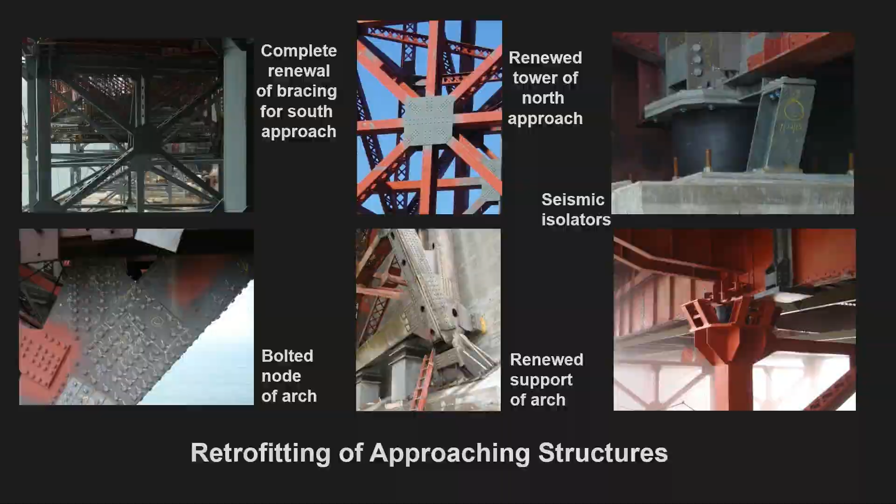Here, no, we cannot see that, but maybe in the next slide. Here's a new foundation for the arch, a renewed support, and you see heavily bolted elements and connections. This one is completely renewed, and maybe you see a little that the new bracing elements look like the old riveted ones, but they are laser cut from an entire piece.

So base isolation is coming in, these rubber blocks, seismic isolators, and so on. A lot to be seen, you can see them when you go there. Here's a new tower with an extra reinforced concrete layer on the pier.

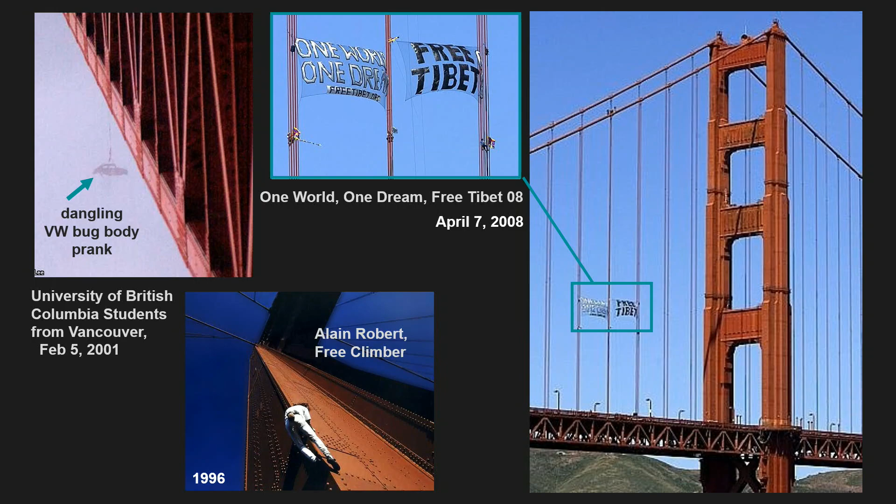And it is used for demonstrations. This one came from the University of British Columbia in Vancouver, 2001. Because I had some connection to them, they sent me this picture where they dangled this VW bug body as a prank, and then there was the Free Tibet demonstration. Alain Robert, the free climber known as Spider-Man, climbed up. It was also misused that way.

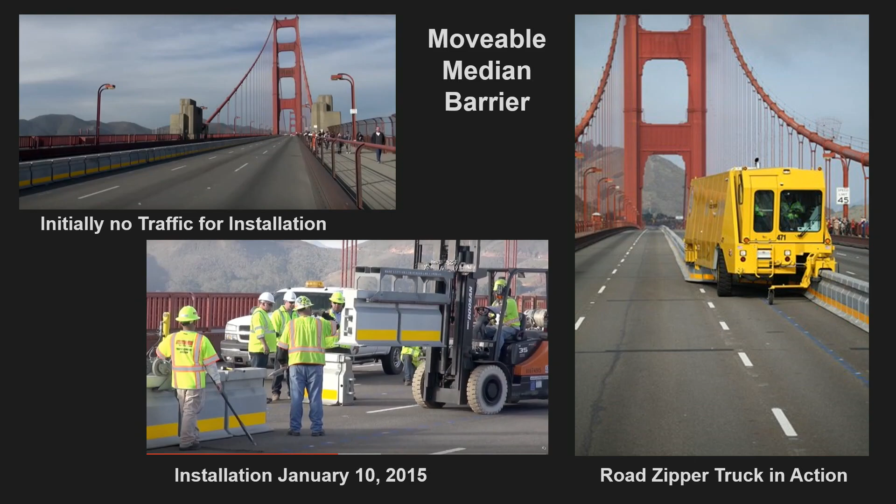The Golden Gate Bridge's 75th anniversary came up with a big celebration. I have not seen anything about the 85th anniversary. Have they forgotten it, or what?

Then we have to talk about the sad, tragic side of the Golden Gate Bridge. The bridge has had lots of suicides, and the official count ended in 1995. Media were asked to stop reporting, to not encourage people to do that. The Golden Gate website mentions that 30 people or more die each year from suicide. Fortunately, hundreds more are stopped through highway and district patrol and the efforts of citizens. They have devices to prevent people from jumping.

In the meantime, the district board of directors made some feasibility studies. At that time, I read that they did not have a unified opinion on that. They were split - some said yes, we have to do that, while others on the board said no, let them do it, we don't interfere here. But they did it, fortunately, in my opinion.

Finally, here are some examples of the vertical parts. The aesthetics is influenced, of course, and the aerodynamic situation is influenced. They made wind tunnel tests and so on.

Finally, they decided to choose this safety net. This is a construction you find in cathedrals sometimes, also in towers. Apparently it hinders people from jumping down, because I had at the very first beginning also to jump on the net before going on. Apparently it has some influence, fortunately, I would say.

Well, then finally they approved that, and it is built. On January 6th this year, I read in the San Francisco Chronicle that the Golden Gate Bridge suicide nets are nearly finished. So they finished the project, and let's hope that it is working.

So, my views from the South Tower and from the North Tower. I would like to say the Golden Gate Bridge was, for many years - 27 years - the bridge with the largest span, before the Verrazano Narrows Bridge came in. In the meantime, there are many, many others, as you see here. The biggest one, the largest, with a span of over 2 kilometers - 2,000 meters - is in Turkey, just recently, in 2022. And there might not be the end.

People are talking about the bridge of the Messina Strait, with a 3.3 kilometer span. It's a project that has all the detailed engineering done already, but it was turned down by past governments in Italy. But the new one, this lady governing there now, Meloni, she wants to have that bridge. So let's see.

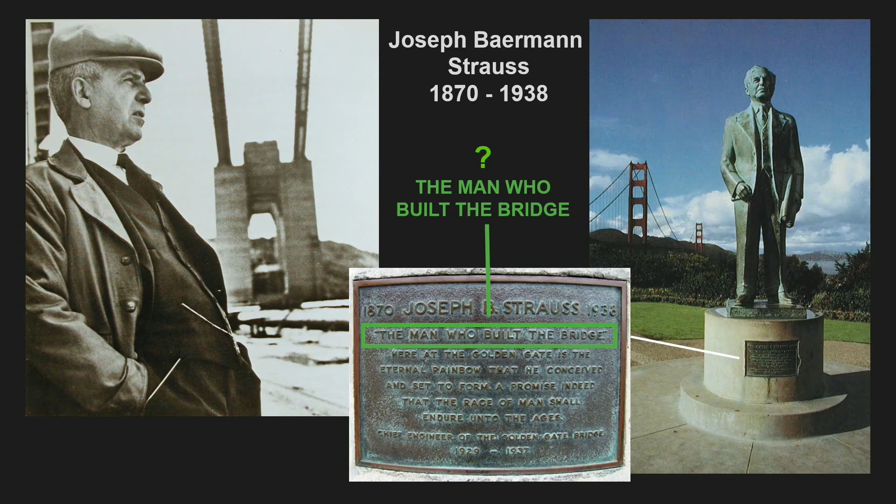So you all know, when you go to the south end of the Golden Gate Bridge, there is this statue of Joseph Baermann Strauss, 1870 to 1938. It has a plaque that says, 'The man who built the bridge.' One man built the bridge - I mean, this is, of course, nonsense, but he did have a tremendous influence on the implementation. There were many others, and unfortunately he has not recognized all of them.

Ellis, for example. And with this slide - with thanks to my guides, I've been often on site here, also with Bob, and Brian Maroney and Frida Seibler on the other side. Thanks to my dear friends and colleagues, Alex Cordelis and Carl Piester, and to you, Bob Taylor, I'm so glad that you are here today. Thank you so much. Thank you all very much for your attention.